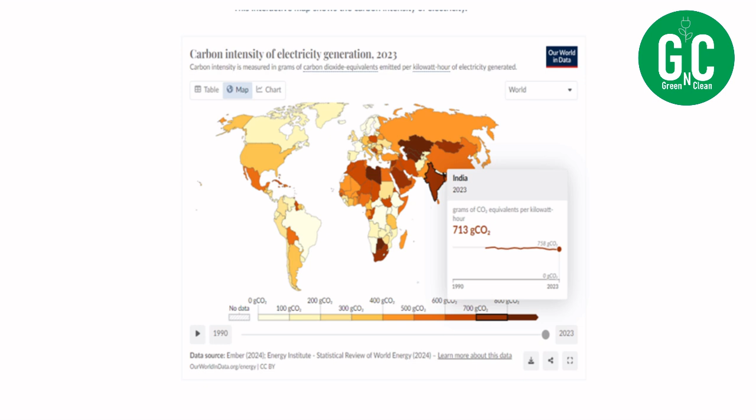Now, this number is slightly dicey because it depends on which country or which state you are drawing the power from. Some countries do use more coal and natural gases, whereas other countries use less coal and natural gases. So this parameter changes. I am considering India average here, taken again from this website. So here it says it is 713 grams of CO2 emissions per unit of electricity produced today.

So that's that parameter. The next set of parameters is the emissions caused during the manufacturing process of the car. You can see here ICE car, it takes about 8,500 kilograms of carbon emission while producing the car, whereas for the EV, it is higher, 14,300 kilograms of CO2 emitted to produce one EV car.

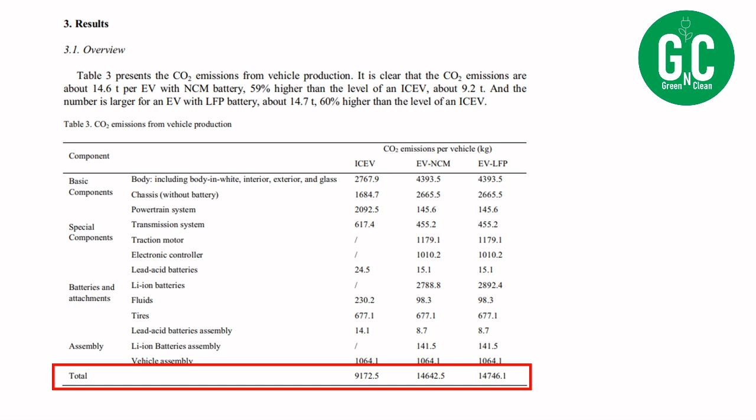These are rough figures. Again, the source is mentioned there from where I got these numbers. These numbers are not cooked up by me. So I'm just sharing a screenshot so you can see here the numbers. Actually, it is somewhat higher for the ICE car, but I'm just considering in this example 8,500 kilograms for ICE car.

And for running the scenarios, I have developed a local application. You will not see it on the internet, and it looks something like this. I'm just sharing the screen grab so that you can see it closer, because when I run the demo, it might look very small and you might not know what is what. All the parameters that we discussed just now are all mentioned here in this form. So next, I'm going to head over to that application and show you a demo.

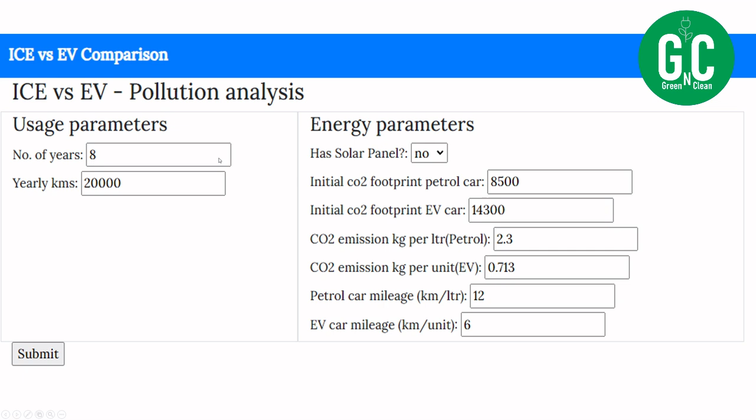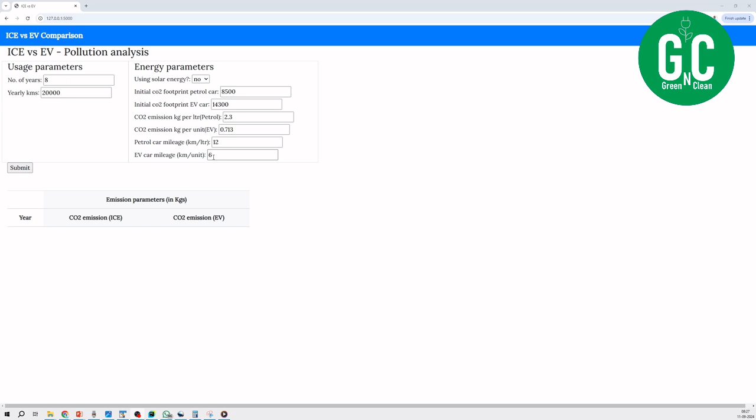Okay, here we are. This is the application I was talking about. First, we will try with an example of 8 years of running the car at 20,000 kilometers per year. And I've inputted all the parameters that we discussed a while back. So 8,500 kgs of carbon footprint, and every parameter I've added. And let's see what we get here when I submit.

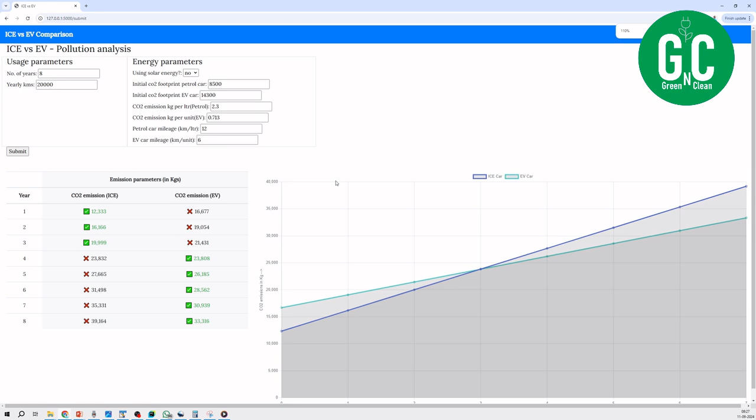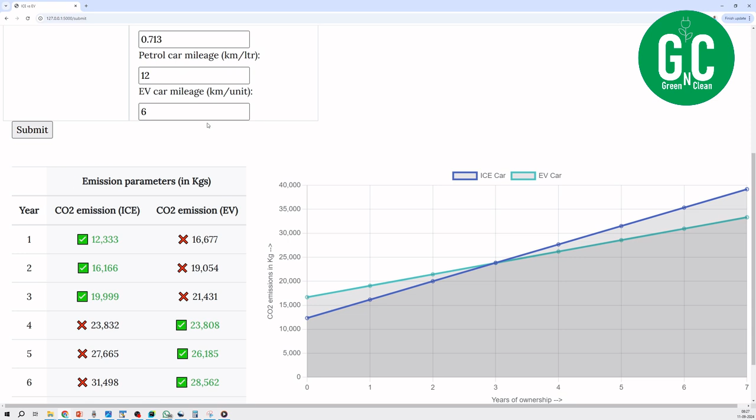Let me zoom in a little bit so that you can see it a bit better. All right, maybe this looks good. So let me explain what is happening here. You will see a table where, at the end of every year, what is the total CO2 emission for an ICE car versus EV car. So this is a tabular representation, and on the right side, you will also see a graph so that those who are comfortable with graphs can see the graph, and those who want to see the numbers can see this table.

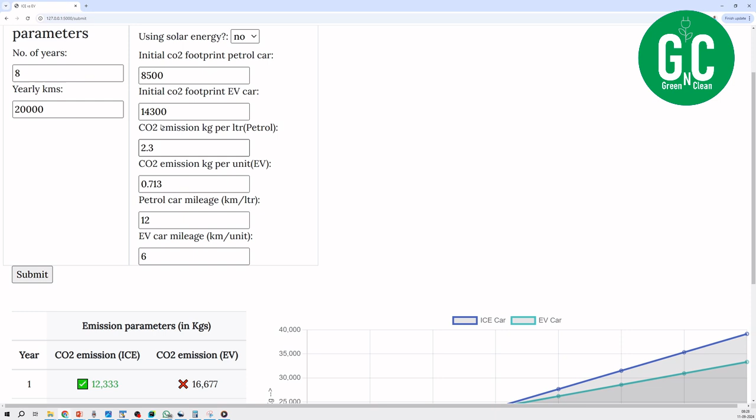So what is happening here is the first year, if you have an ICE car, you have emitted 12,333 kilograms of carbon. This is carbon emitted during the production of the car, which is 8,500, plus whatever carbon emitted for running 20,000 kilometers. I'm calculating it based on the mileage factor given here and how much is the carbon footprint per liter or per unit, whether it's ICE or EV car.

So the ICE car emits 12,300 kilograms of CO2 at the end of the first year, whereas EV emits 16,677 kgs of carbon dioxide. So it is higher, and you'll see these tick marks, which show the winner of the two in first year. So clearly, ICE has polluted less by the end of first year. This is total pollution and not the pollution caused just while running 20,000 kilometers.

So it goes on for second, third year, and when it comes to fourth year, this is where you will see that the EV car has caught up with the emissions compared to the ICE car. In this example, the EV car has emitted 23,800 kilograms of carbon, whereas the ICE car has emitted roughly the same amount, but it's just more by a small margin. And as you go on driving EV car over the years, this gap widens. In the graph here, the blue one is the ICE car and the green one is the EV car.

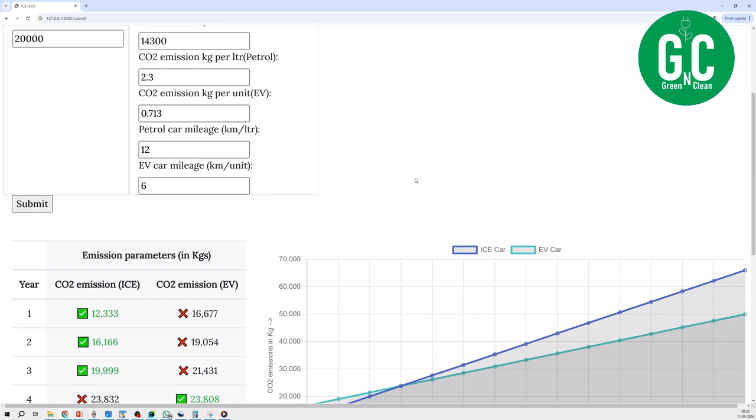You can see that roughly around the third year mark, both the cars have emitted the same amount of carbon, and after that point, it is always the EV that is winning. Less pollution means good. So EV has polluted less compared to the ICE car. And now, if I extend this to the life of the car, considering 15 years as the life of the car, you will see that the EV car has caused 49,000 kgs of CO2 emission, but the ICE car has caused 65,000 kgs of CO2 emission.

So you can see this gap widening and widening as the year goes by. So what is called as from cradle to grave emission, clearly EV is the winner here for this kind of a usage, 20,000 kilometers, 15 years.

Now there's another angle here. I've added solar energy. Or before discussing solar energy, what I wanted to tell you here is this number, 713 grams per unit of electricity produced, right? So this is the figure today. But as we go more cleaner and cleaner electricity production, this number is going to reduce. It is going to reduce much more than the CO2 emitted per liter of petrol cars, right? So that is going to happen.

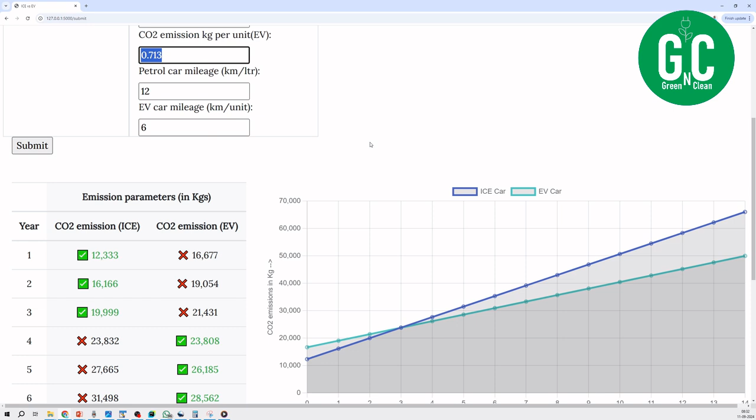But I'm considering today's scenario. If we consider today's scenario and if we maintain the same level of electricity production mix, then this is what we are looking at. But most likely, this green line will flatten and flatten because there are more initiatives for the cleaner energy in the energy sector. So that's bound to happen, but I'm just considering what is there today.

Now, the other angle is the solar energy. If you have an independent house with some space in your terrace, then it is advisable that you go for solar energy. Even if you're not going for an EV car, please install solar so that you can get free electricity for about 15 to 25 years roughly, and the electricity that should have come to your house can be used by another house which wants to use EV, for example.

So let's see what happens when I switch this on. If we consider somebody having solar energy and running an EV car, how does the equation look? So you can see here the emission caused by EV car is flattened right away, right from the first year. So it is just what is caused during the production of the car, and after that it's going to be flat. And you can see the difference between the ICE car emission and EV car emission in this kind of a case, right? So you will see again a total of 65,000 kilograms of CO2 emitted versus roughly 14,000 kilograms of CO2 emitted. So that is the difference, and it is huge.

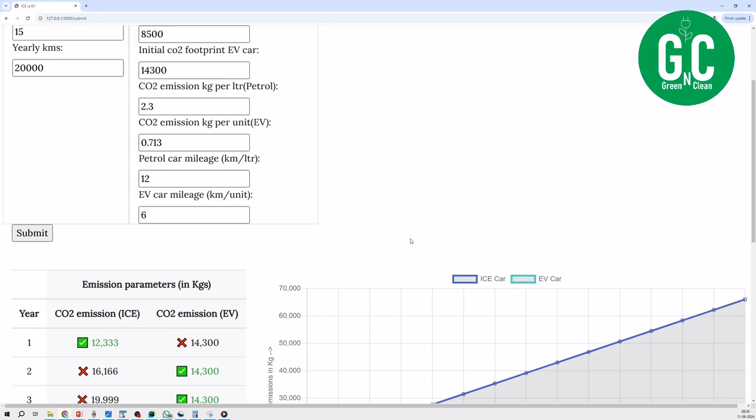I know you would say that not all of those kilometers run are using solar power. There may be some mix where you draw power from the grid or from public charging infrastructure, but I'm just showing you theoretically what happens if you go for a solar panel and an EV, right? So you are saving a whole lot of pollution, and I could not get an exact figure of how much pollution is caused while creating solar panels, but I'm pretty sure it's not so huge. So there is some pollution caused while producing solar panels, but that's also one time. So I expect this graph to be slightly above, but definitely not to these levels.

Now, let's change this to a heavy user scenario, like somebody like a fleet operator or somebody who travels a lot, 40,000 kilometers in a year, which translates to about 6 lakh kilometers, which is a highly insane number, but just for calculations, let's see the emissions in this case. So in this case, straight off the bat, within a few days itself, the ICE car emissions exceed the EV car emissions. You can see it here. Within the first year, the ICE car has emitted more than the EV car. And if you see the total, you're talking about 1,23,000 kilograms of CO2 compared to the same CO2 levels that you saw in the other examples, right? So that is the effect of having solar panel and the pollution for this kind of a heavy usage.

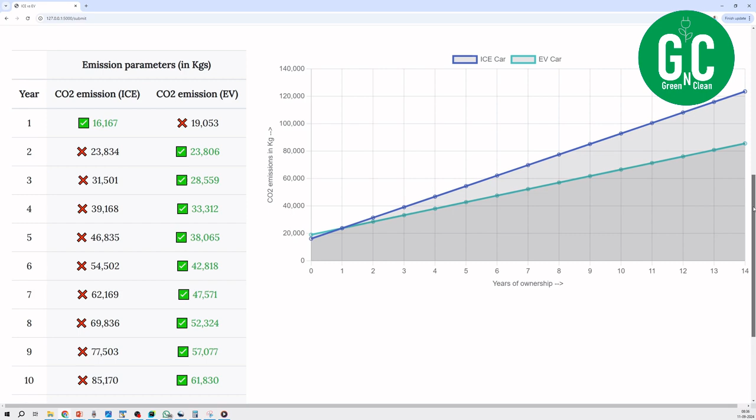Now let me just switch off the solar energy and see how it is for this kind of a scenario. So it is 85,000 kilograms of CO2 emission for EV cars versus 1,23,000 for ICE cars. So the difference is still huge, as you can see here. So this hopefully rests the argument that EV cars also pollute, and pollute more than the ICE car. The EV cars do pollute, but over a period of time, from cradle to grave emissions, if you consider, it is always the ICE car that pollutes more than the EV car.

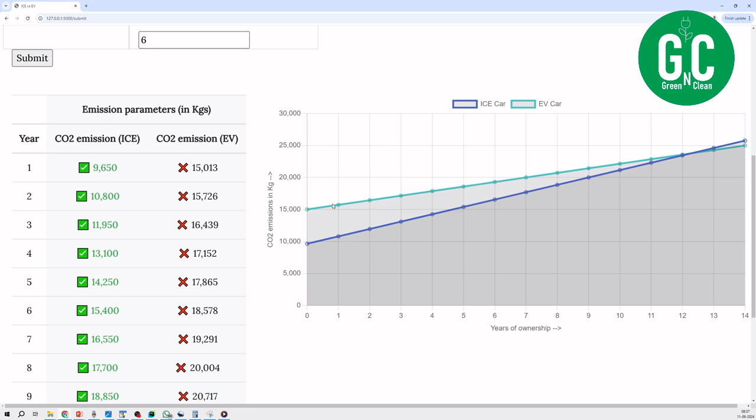Now, for the sake of completing this demo, let's check for a user who just uses 6,000 kilometers a year, the rare usage kind of a scenario, right? So for 15 years, 6,000 kilometers with no solar panel and all of these figures. If you see here, it does take a lot of time to catch up between the two cars. So for example, it takes about 13 years before EV cars make sense over the ICE car.

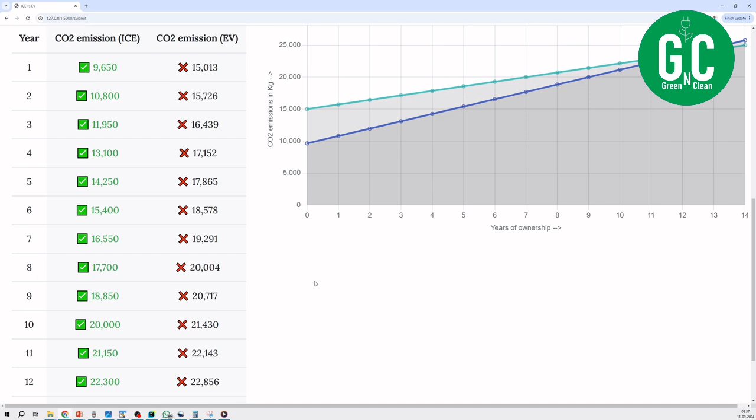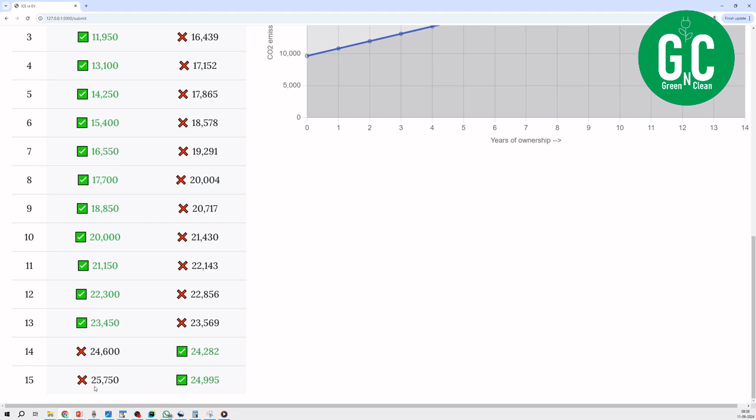So the point I wanted to draw here is, if you are somebody who is using the car very rarely, like 6,000 kilometers a year, then you are not polluting much even with the ICE car. So maybe going for an EV to reduce the emission doesn't make sense for this kind of a usage unless you go for 12 years or more. Only then it catches up, and the difference is very small, as you can see here. If you see the end figures, it is 24,900 kilograms versus 25,700 kilograms. So the difference is very less. So if you use the car less, then this difference in emission is also going to be less.

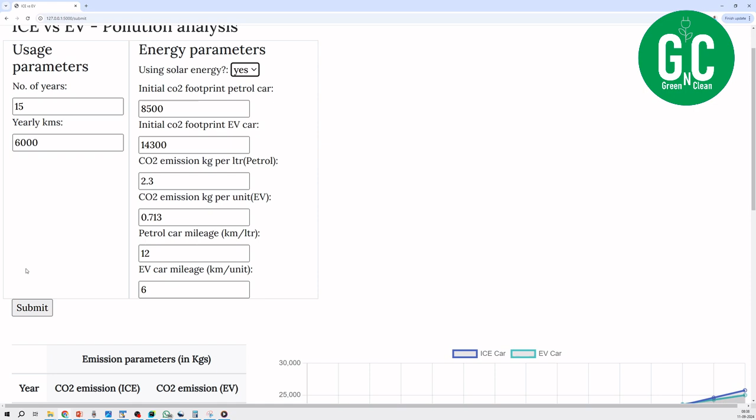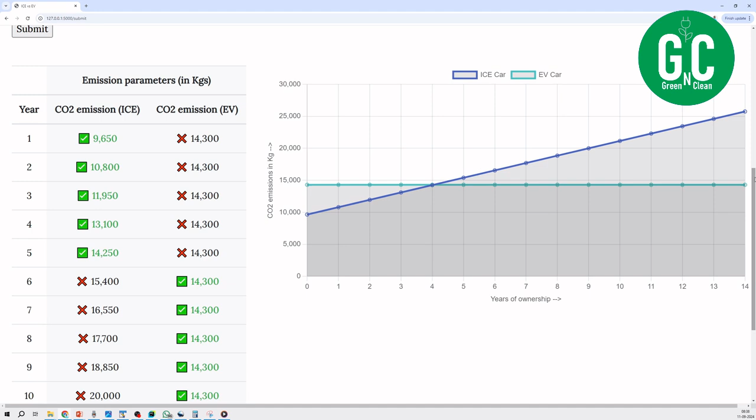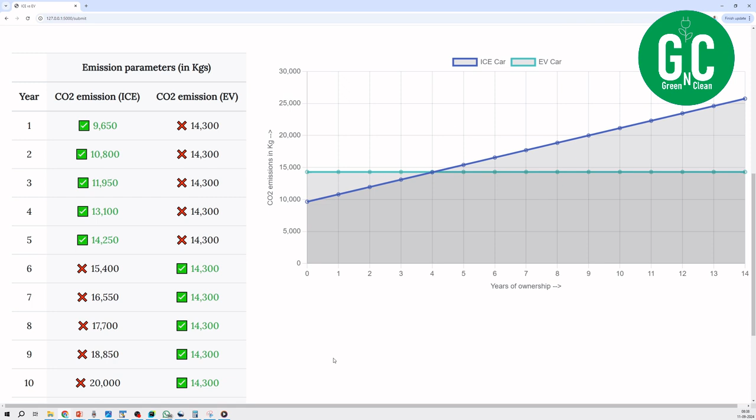So that's the point. But if I say yes for solar energy in this kind of a scenario, then what we get is somewhat better. Like after the fourth year, both the cars catch up, and then afterwards it's the ICE car which keeps polluting more, and the EVs pollute less. So that's the scenario. So even in this scenario, if you have a solar panel, then it makes sense to have an EV car over an ICE car, and that's the point I wanted to draw here.

Now, I should also consider hybrids because nowadays hybrids are becoming popular. So how does this scenario look in the case of a hybrid? So, again, going back to this form, I'm considering the example of 8 years, 20,000 kilometers, the normal usage, no solar panel. Now, the CO2 footprint of a hybrid car obviously is going to be more than a petrol car because you have a battery and you have an engine and the normal manufacturing that is needed for a petrol car, right? So it's both worlds. So I will add these two figures, the pollution cost.

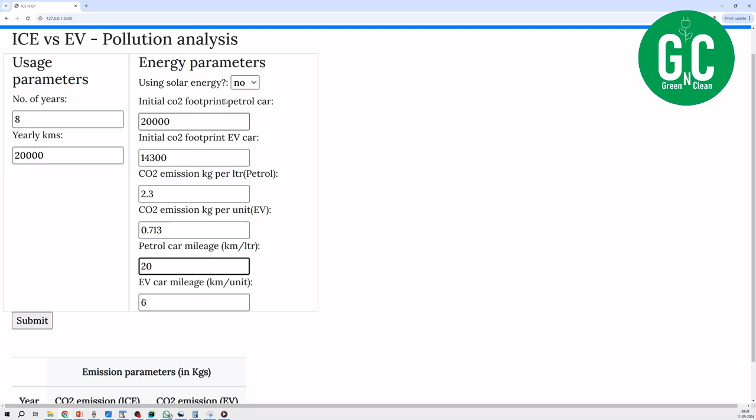So let me make it like 20,000 kilograms of CO2 footprint because a hybrid has both battery and the engine. So it starts on the higher side compared to EV. But where it makes a difference probably is the mileage. So this mileage is going to be more for a hybrid. So I will consider 20 kilometers per liter as the mileage for this kind of a hybrid car. So now we're comparing hybrid, higher carbon footprint, but a better mileage, and let's see how the numbers look.

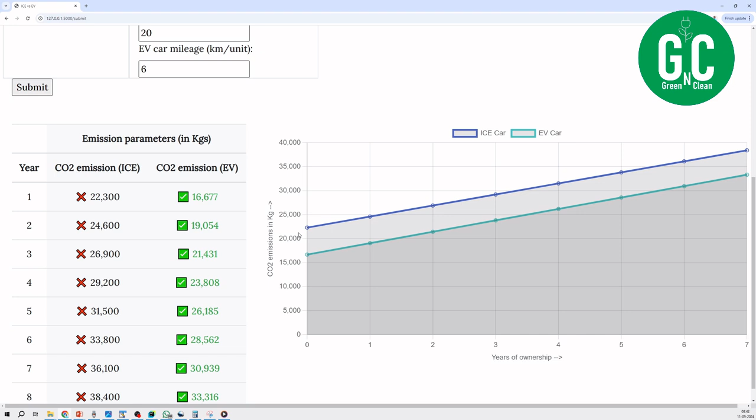So this is an interesting graph. If you see, both the ICE car and EV car lines are going parallel to each other, but the ICE car starts off with a higher number and keeps growing at the same rate. So the CO2 emitted is probably the same while you run the car, but because you used both the engine and the battery for production, it is slightly higher. So you will see here the numbers for the life of 8 years and 20,000 kilometers of running.

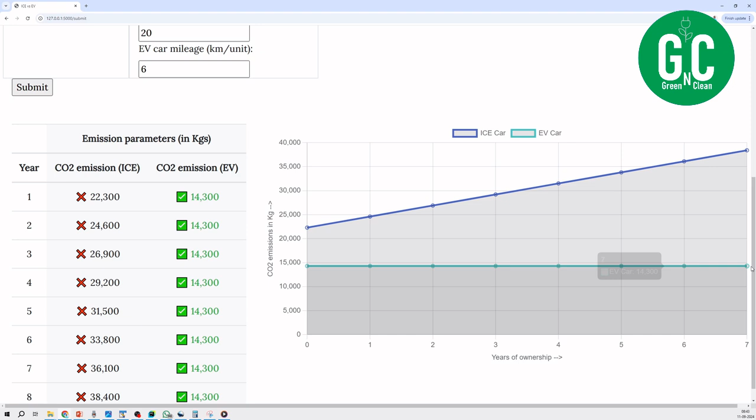So you will see that the EV car has emitted 33,000 kgs of CO2, whereas the hybrid car has emitted 38,000 kgs of CO2. So hybrids are still higher, but it is way better than the pure petrol car example that we saw earlier. And in this case, if we have a solar panel, obviously, I guess we will see a clear demarcation here. So the line for EV gets flattened because you are consuming electricity produced by the solar panels, so therefore zero emission, and you see the gap here. So if you see the example, it is 38,000 versus 14,000.

So a significant figure. So in a nutshell, hybrids are better, obviously, and you have seen how much better compared to a pure petrol car, but still they don't match up to the same level as an EV car, whether you have a solar panel or you don't have a solar panel. So that's the point I wanted to bring up.

So in a nutshell, what we have seen is that in most cases, the CO2 emission by EV is lesser compared to CO2 emissions by a petrol car or a hybrid car. And we are considering cradle to grave emission, meaning from the birth of the car till the car is junked after 15 years. So that's the scenario we have looked at.

Now, in this example, I have not considered the effect of the catalytic converter that is there in the ICE cars. The catalytic converter does help to reduce the pollution, but I think it will be offset by the fact that petrol has to be brought in from the place where it is extracted to the petrol pump. So it goes through various phases of emission. So both of them will probably nullify each other. So that's why I have not considered the catalytic converter effect in this pollution.

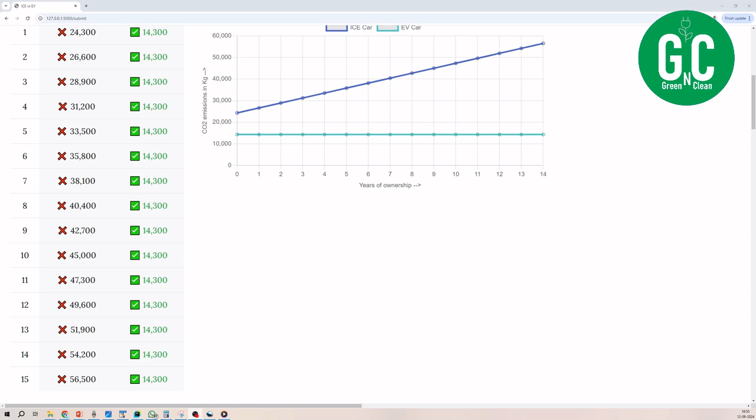I hope this bursts the myth that EVs also pollute, the electricity is also causing emissions and things like that, right? So it's all true, but if you really look at the numbers and practical scenarios, it's the EV cars that pollute less than the ICE cars. Only in the case of somebody who drives the car very rarely, for them it doesn't make sense to buy an EV car to control the pollution.

So that's the essence. I'm sorry this episode took much longer than I expected, but I had to explain this and draw a point, and that's why it took so long.